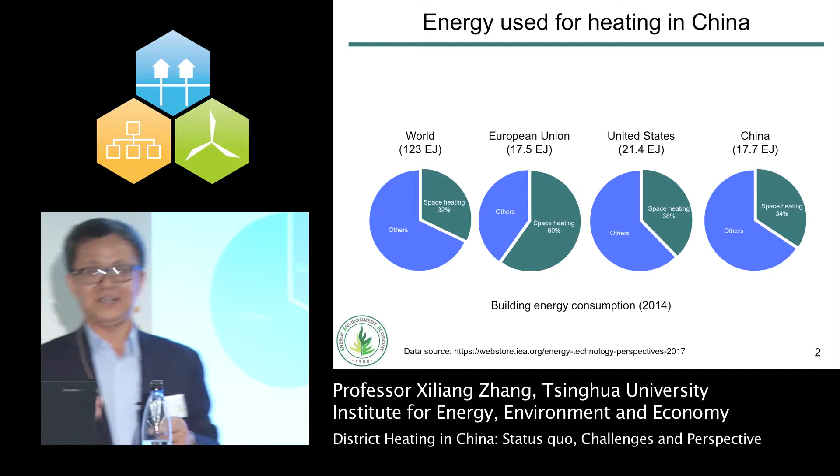If you look at space heating, the contribution is about 34%, but in Europe it's 60%. So it's a little different. This is the situation.

Why is it that in China the building energy consumption for space heating is not so much compared to total energy consumption? Before China's reform and opening up, the government set a line for space heating.

You can see this line runs along the Huai River and the Qinling Mountains. North of the line there are space heating facilities, but in the area south of it, there are no space heating facilities at all.

At that time the government wanted to save money, since there wasn't much money, and the people also didn't have much money, and there wasn't much energy. So this was the big policy.

This policy, this regulation, hasn't been deleted yet, so it still works. But because people have become richer, in the south part of China, even without district heating pipelines, people now also use air conditioners for space heating in winter.

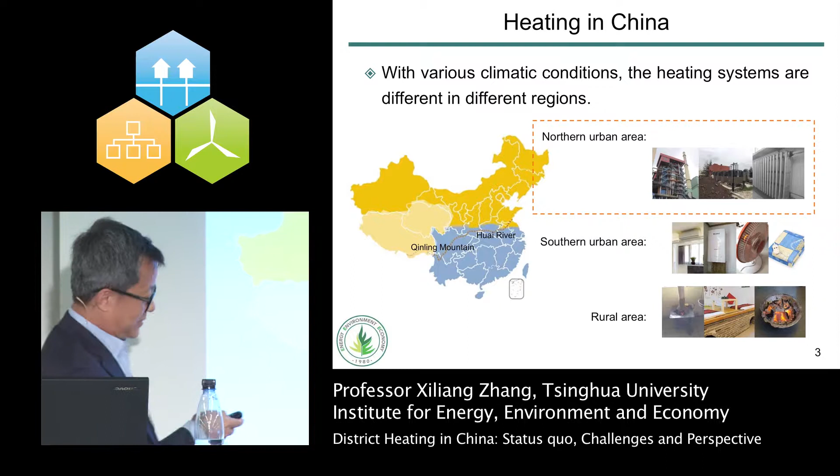But for rural areas it's stoves, and only in the southern urban areas, air conditioners. So that's the basic picture of China's space heating energy use.

You can see Shaanxi province is almost near the space heating line, while Heilongjiang, in the far northeast of China near Russia, has much higher space heating demand.

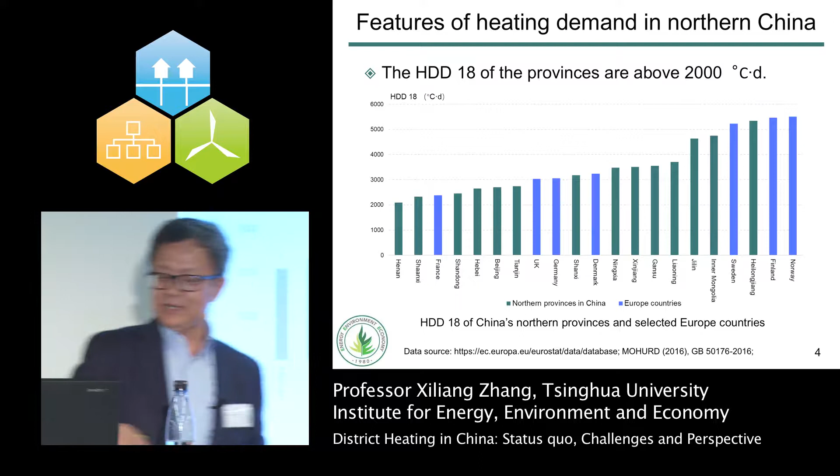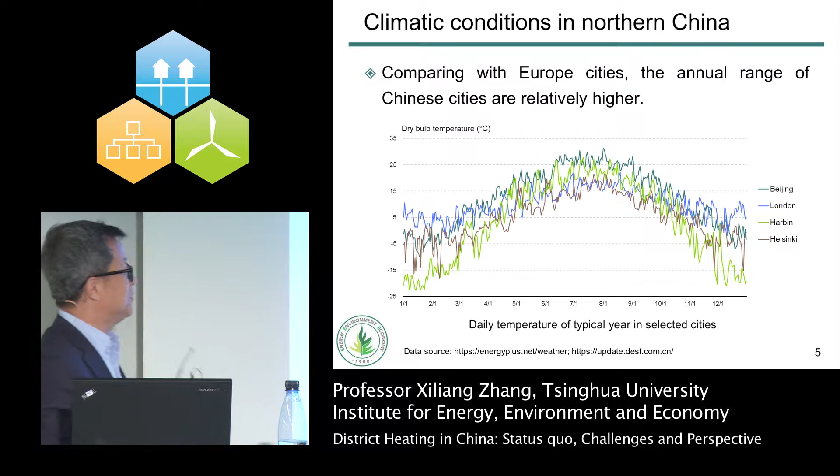In Beijing, in summer the temperature is very high, and in winter the temperature is also very low. There's a big difference, and this is something you have to consider when thinking about space heating solutions.

This feature, and also you can see. So now we go to the main point, the main theme of our conference. So it's about the district heating.

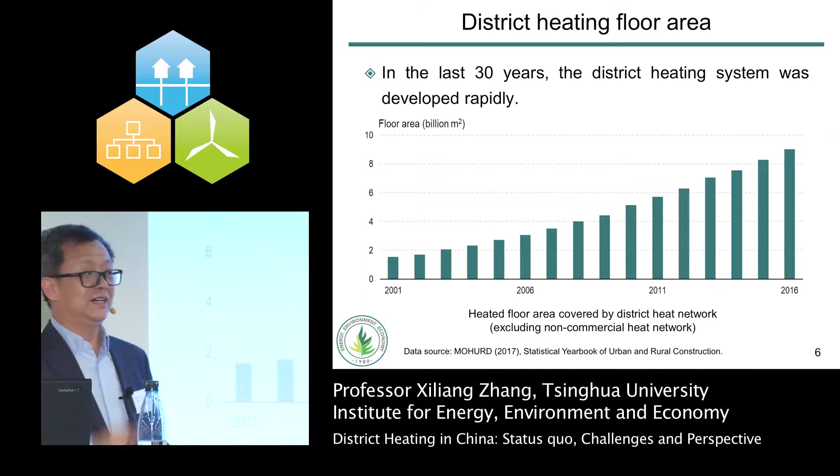This is the district heating floor areas. You can see significant, sustained growth for the district heating areas in China. I think it primarily happened in the north part of China, as you can see.

And also there is a comparison of district heating and other ways, the size of other space heating by other resources. There is also an increase, but not so much. Most of the increase happens in district heating.

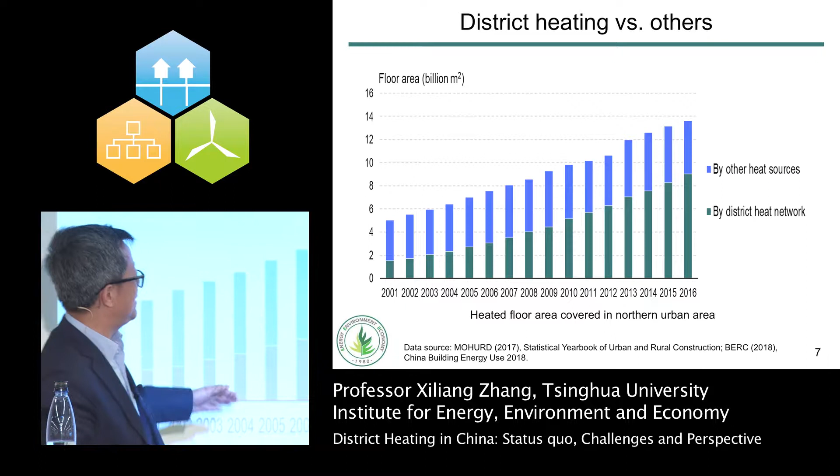Erica, I think from your project and this initiative, you will come up with very innovative technological options. I think it's very meaningful for China.

As I mentioned, the floor area has increased significantly, but the energy consumption is not too much. That means the energy efficiency has been improved significantly by replacing low efficiency boilers, by introducing more CHP, more efficient CHP.

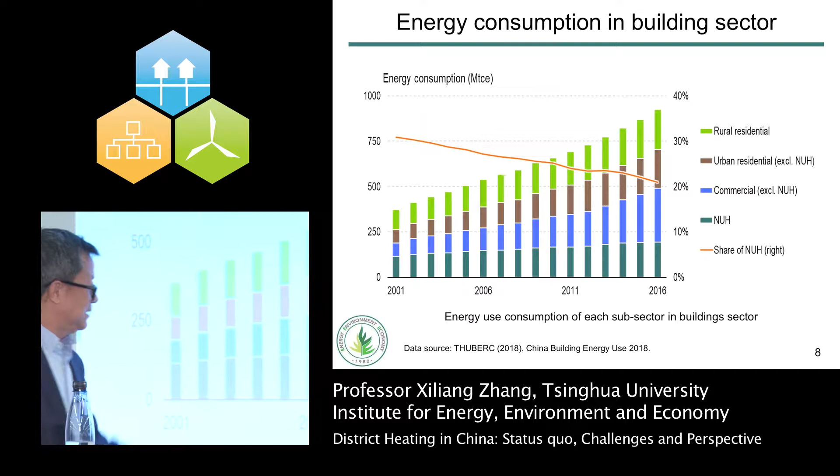So the energy conservation in the building, for the building energy.

Why? Because of the pollution, the air pollution, in Beijing and the big cities, Beijing, Hebei and Tianjin. Because of the air pollution in Beijing - I don't know how many people have in Beijing, you go to Beijing, they have 6 rings, it's very big, 6 rings.

So within now the 5th ring, all the coal-fired boilers for space heating have been phased out, forced retired, and replaced by natural gas-fired boilers. I think this is why, just very recently, there is a very fast growth for natural gas use for space heating.

But primarily it's still coal. And also, you can see, I have some concern, because the size is very big, so there is something like a lock-in, a technology lock-in. Regularly, how to change the situation? How to address the stock? I think it's a big challenge.

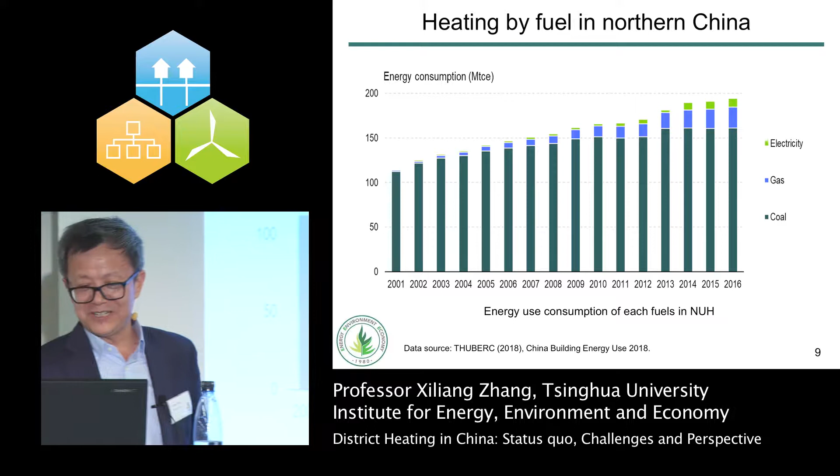Maybe Eric, you can help us find some innovative solutions. Also, you can see for the space heating efficiency in the north, it has been improved significantly for the whole building sector. So the intensity is increased.

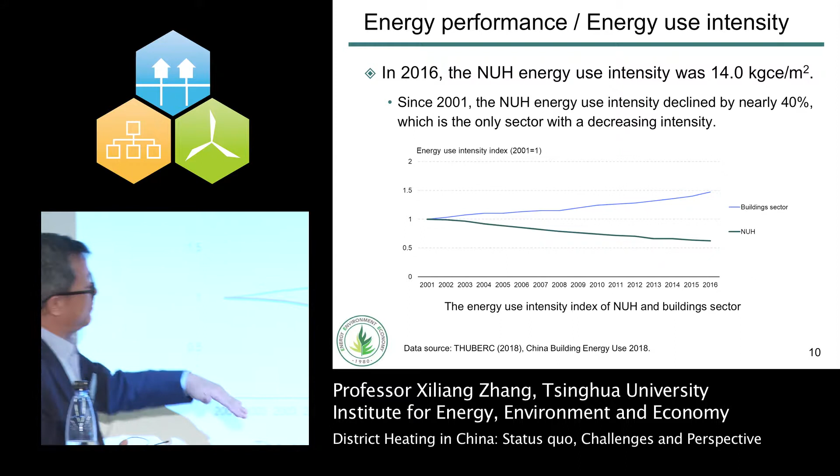Why? Because the income of the people has been increasing. They need more space heating, and also they would like a more comfortable life, so they use more energy for the buildings and for the commercial buildings. But I think in the north, because of the district heating, the intensity, the performance is still getting better. This is, I think, the situation.

But I think, on one hand, most of the space heating energy comes from coal. But this shows that in China there is actually a very big problem: overheating. You can see the government has standards for space heating, it's 18 degrees.

According to a survey conducted by the Building Energy Center of Tsinghua University, you can see almost every month there is big overheating. The temperature in the room is much higher than you actually need. Because I also have an apartment at the university, the space heating - Tsinghua University is very good to the professors.

They would like to keep the temperature very high, so sometimes we have to open the door, especially in the winter. This is my experience, but later I will tell you why - because the tariff, the bill, is based on square meters, not based on the heat. So I think it's a big issue.

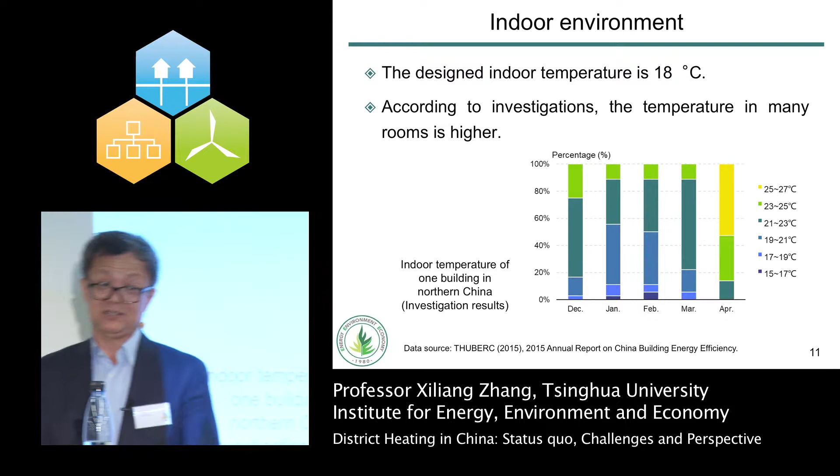There is a big waste of energy in space heating, particularly with coal-fired boiler space heating, which is also a big contributor to air pollution. In Beijing, you can see the concentration of PM 2.5 is much higher in winter than in summer.

That's why the Beijing municipal government made a decision to force the retirement of all coal-fired boilers. At Tsinghua University, we also have several big plants with coal-fired boilers. At the end, I think in 2015-2016, the boilers were replaced by natural gas boilers.

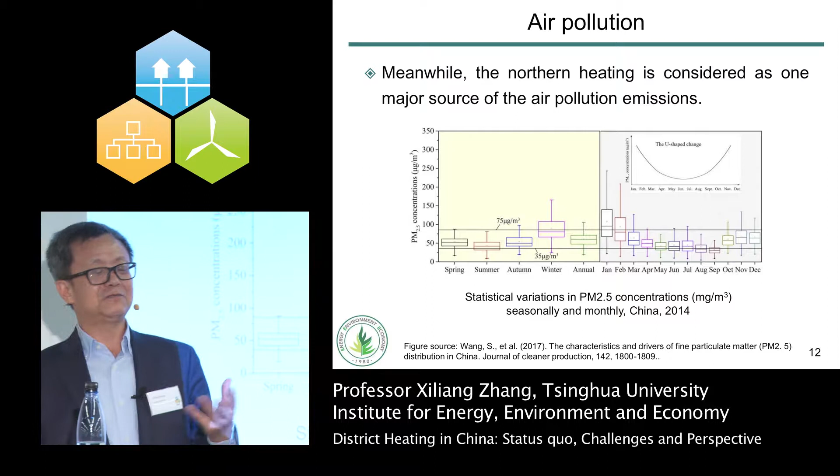Then the bill for my heating increased significantly. Anyway, I think air pollution is a big driver for the government's fuel switching from coal to natural gas, and eventually to renewables. But I think there's still a long way to go.

We meet a lot of challenges, including how to manage the overheating, how to manage indoor temperature and energy consumption - primarily coal - and air pollution. There are many problems and issues that need to be addressed.

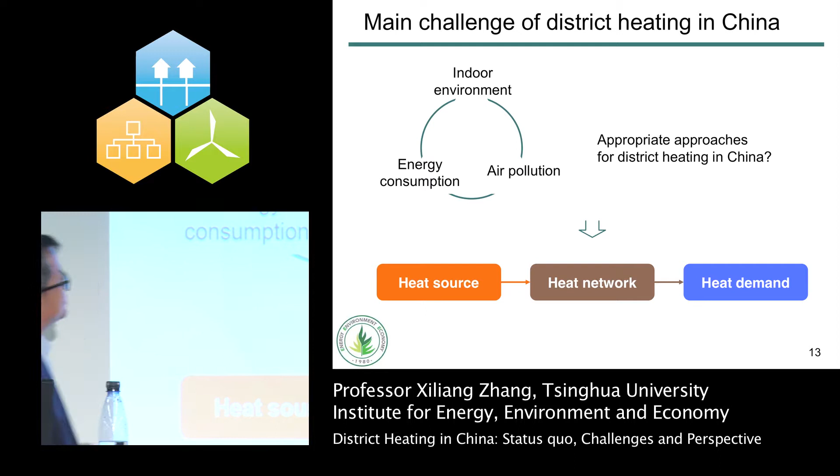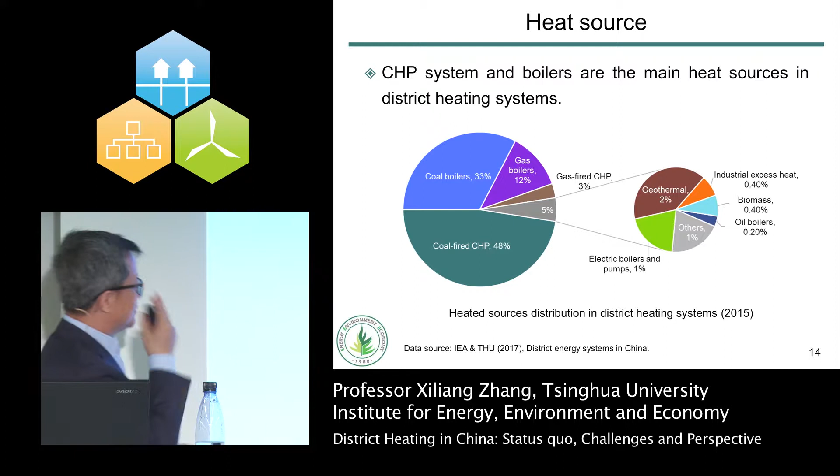So how do we address these issues? We are thinking we could target the heat source and network, and also the heat demand, addressing the issue from different areas. For the heat source, coal boiler and coal-fired CHP are the large majority. The natural gas boiler contribution is very small - only 12%. The others are even smaller. So this is a big issue.

In terms of addressing the heat source, we can introduce absorption heat pumps for the current CHP power plants, and also recover heat from gas boilers. There is also potential in China for this.

For the future, I think heat will come from industry - this is different from Europe. In China there are big factories, like cement factories, petrochemical, and steel and iron plants. There is a lot of low-grade heat from these. This heat can be used for space heating, which will save a lot of energy and also reduce CO2 emissions substantially.

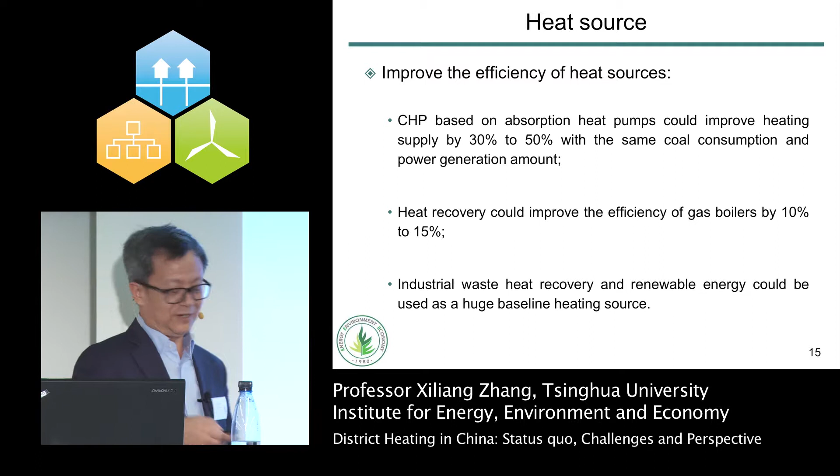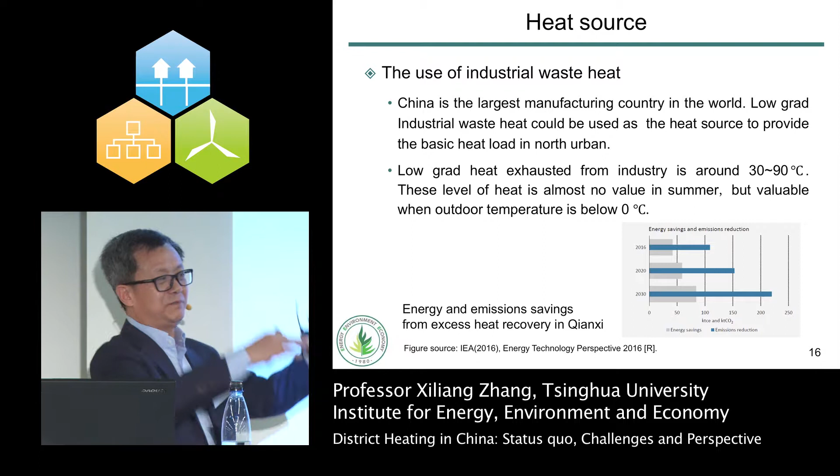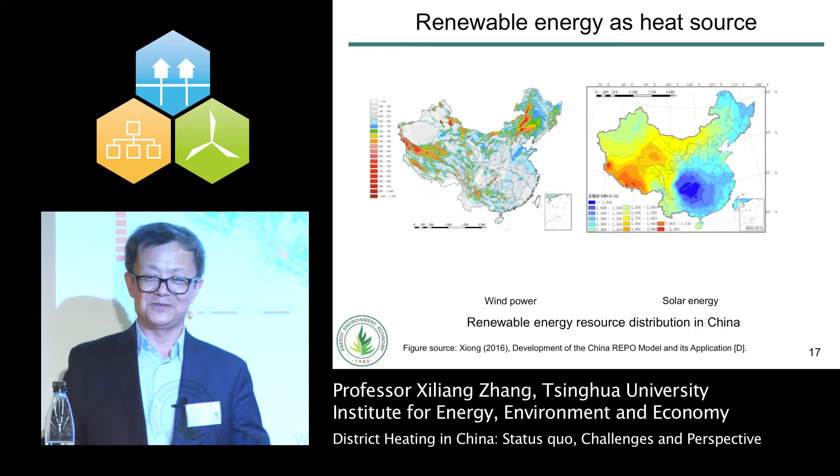This shows there is big potential with the heat resources available in the China sector. Now we are also thinking about 100% renewable solutions. In China there is abundant wind and solar resources. In the future, switching from coal to renewable by introducing electric heat pumps may be the ultimate solution for China to address space heating issues and the heat network.

China is a big nation, and the heat system is also very big. One system usually covers a building area of more than 40,000 square meters - it's a big heat system, not like here in Denmark where the district heating system is much smaller. In China, it's very big.

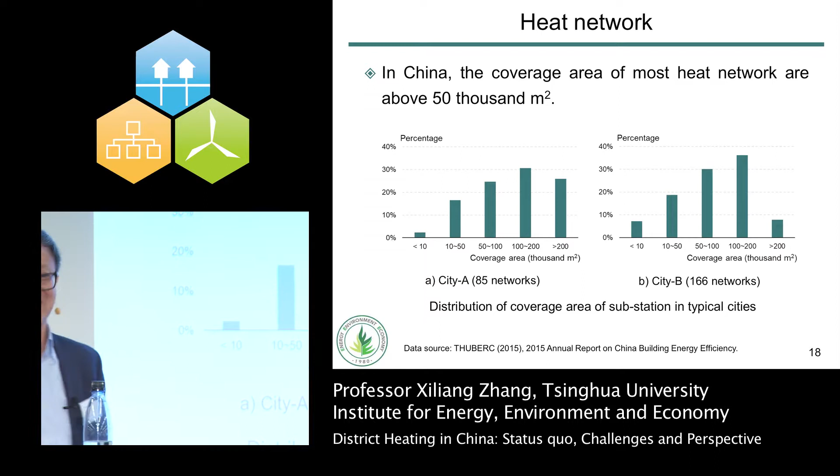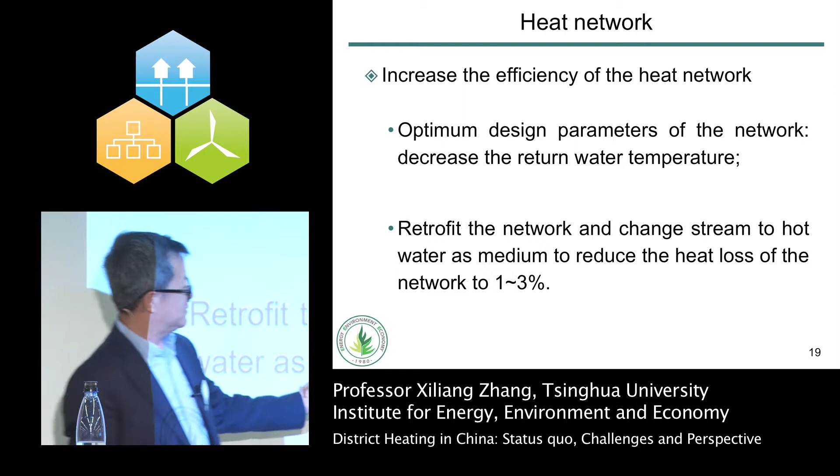In this context, we really need to optimize the pipeline and the heat system. There's still a lot of space for improvement, because even in Beijing a lot of the pipeline network was built 20 years ago. There is a real need to update and retrofit the pipeline system, though this is only a small part. Some areas are developed, but some are still really underdeveloped. In some parts, the pipeline carries steam but not water, so there's still a need for change. This kind of change also makes a lot of sense for energy conservation.

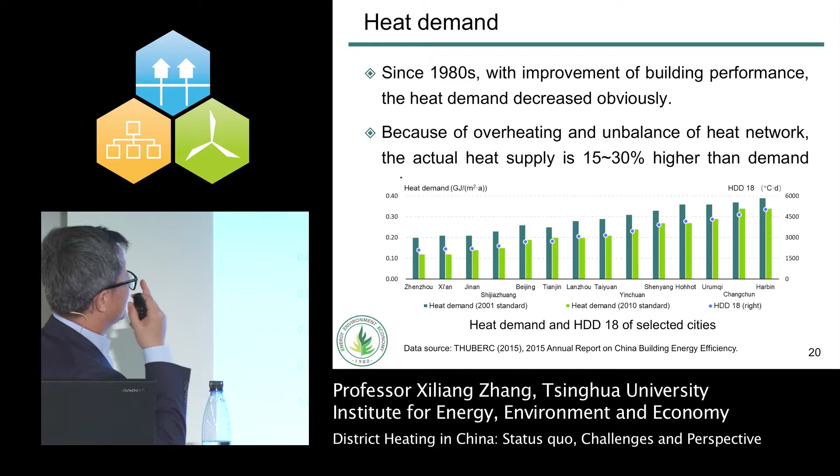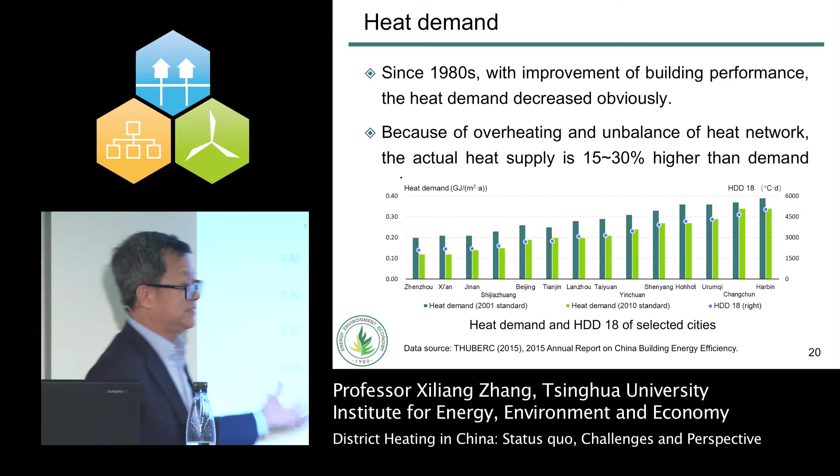Now let's go to demand side management. China builds many new buildings every year, and the new buildings follow new energy codes and energy efficiency standards, including better insulation. As a result, there's an obvious decrease in energy demand in China. But because supply and demand are not well integrated, it leads to big energy loss and waste—about 15 to 30% of energy is wasted. So this is about how to match demand and supply. That's a big gap to fill in China.

So these are some options for demand side management. I think it's very important to change the bill calculation system.

I have two apartments: one in the Tsinghua University campus, one outside. The heat bill at Tsinghua is based on square meters, but the bill in the other apartment is based on actual heat usage. My wife cares a lot about this—she always checks the temperature, and if a room like the study has no one inside, she closes the heat. They do a lot to save money and energy as a result. I think it's a big change.

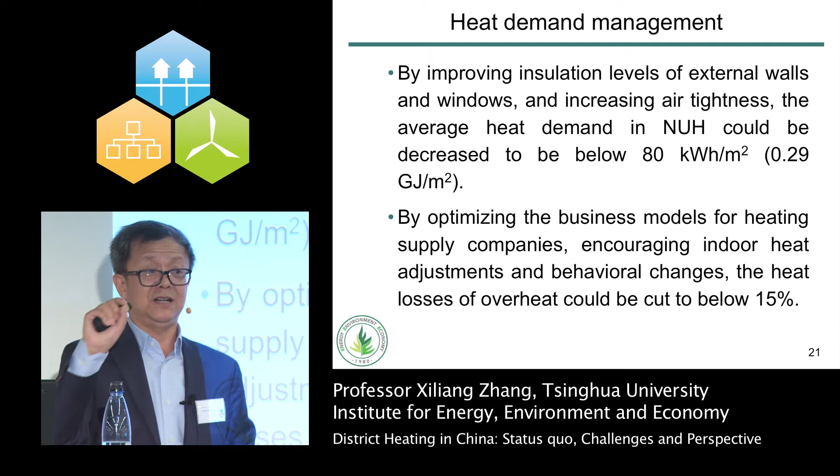There is some estimation that changing the metering approach from square-meter based to heat based will lead to an energy consumption reduction of 15%. I think it's significant.

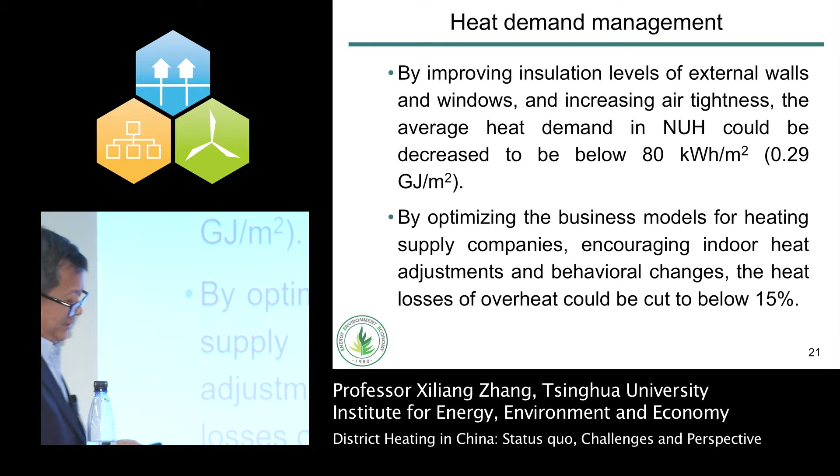Now this is something about new standards for a new district heating system—specifically a standard for a natural gas fired heat supply system. This covers primary energy consumption, energy efficiency, losses, electricity use for the water pump standards, and the overheat ratio, which should be no more than 15%. This is really the demand for heat: about 0.19 gigajoules per square meter per year.

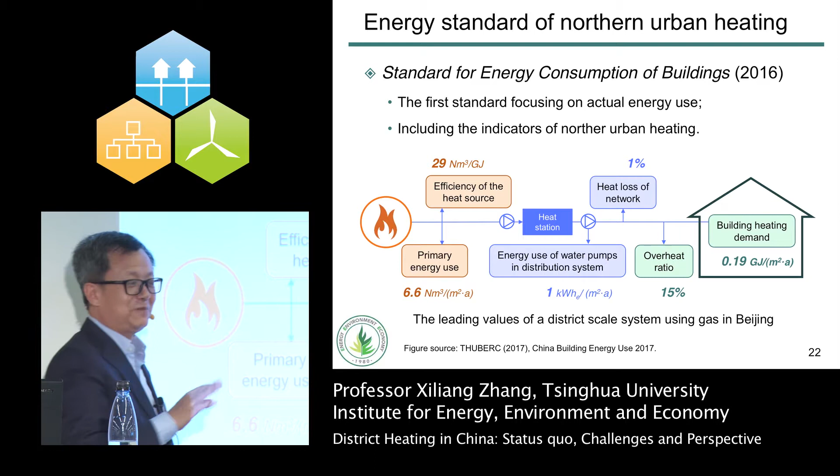I'm not sure, but this kind of standard setting is very much in line with your study. Anyway, let's look at the future.

What would the next generation look like? Maybe the system won't last 30 years—maybe just the next 10 years, because China is changing a lot. We cannot have a very long-term perspective right now. I think for China, it's very important to address how to handle the existing stock.

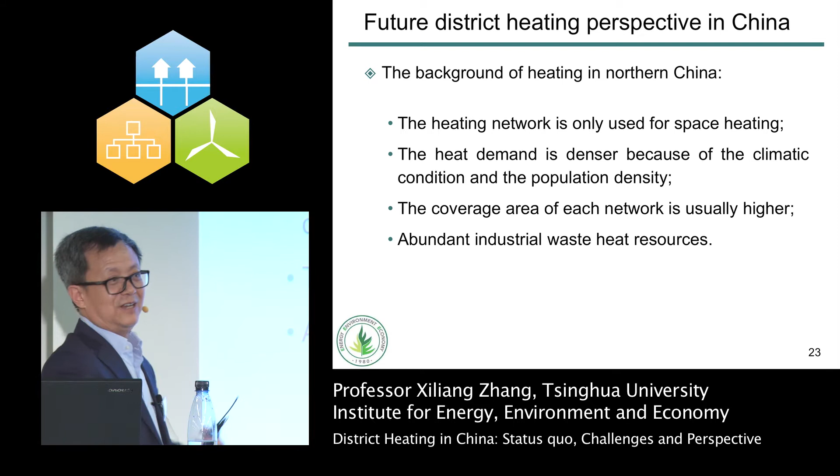This slide shows some of our thoughts about the future of district heating, comparing with the EU. First, looking at heat resources: the EU approach very much highlights renewables, but for us, we also consider industry waste heat, renewables, and high efficiency natural gas CHP systems, unlike the EU. That means China's heat resources are more diversified. They need time to transition from a multi-option approach to an ultimately renewable solution.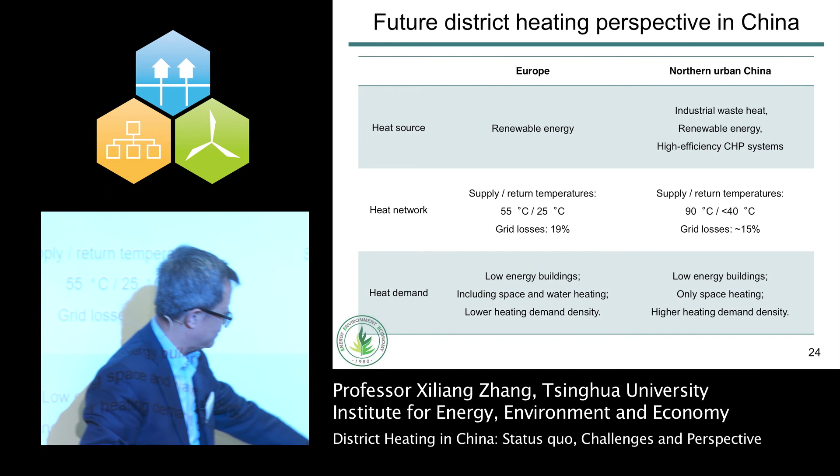But China also has its own features. This part is the same: to increase energy conservation and improve energy efficiency as much as possible. But in the EU, district heating is not just for space heating—it also provides hot water. In China, no—hot water usually comes from individual systems. That's the difference. Also in China, the heat density is much higher because the population density is higher, and the climate demands are also higher than in Europe.